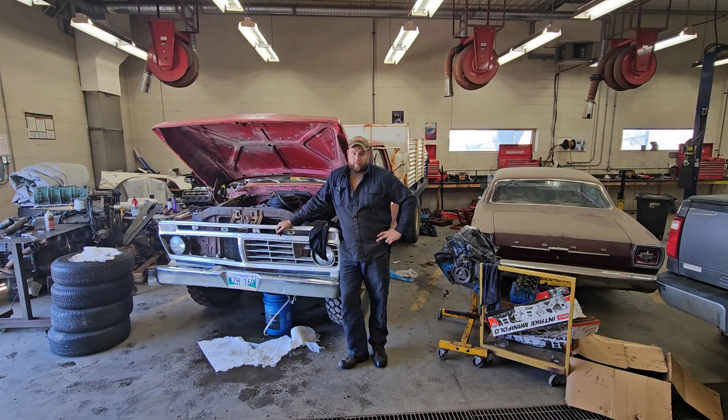If you're seeing this, it means I have survived and I was successful.

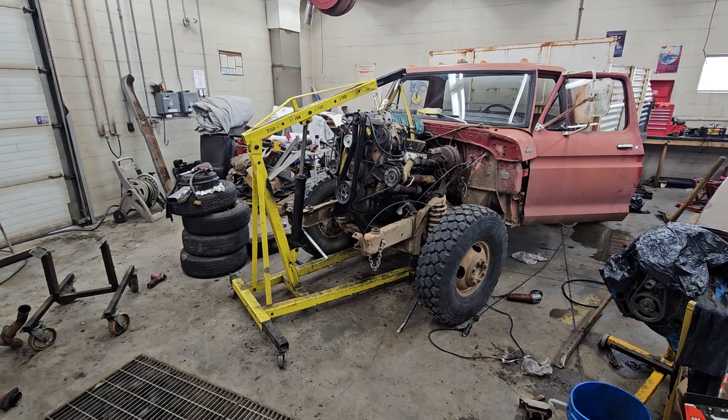So the only kind of thing I have to do here was to take out the Y, the exhaust Y. Give myself a bit more room here. And pieces of floor missing. Pretty sure the time lapse caught that one. Lucky for me, this engine doesn't weigh anything. Okay, I have to go set up the transmission here. Oh, life is painful. So all I'm doing right now basically is I'm jacking up the back of the transmission. I'm trying to, where's my convincing bar? Ooh. Quite a ballet, I must say.

There we go. Okay, so both the mounts are engaged. Wow. There we go. Okay, so that's done. Now we're going to get cracking on the transmission mount, which I don't think I can reuse the factory one. Of course, right? All right, guys. Kind of thought I'd show you what's going on back here. So basically the back end of the transmission here, my jack contraption, and then my cross member. So luckily for me, all I'm going to do is drill 2 holes because you can see there's nothing in there right now. And I have these bolts here, these studs, if you will.

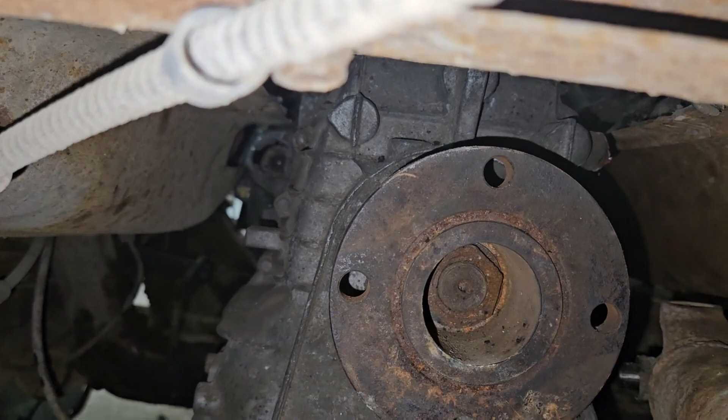Those studs back there have to go through, and that's what physically holds my transmission. So just gonna measure out basically where they are. And then afterwards, I'm gonna drill through the bottom here, put spacers to the appropriate height because the transmission sits just a tad too low right now. Although I have next to no clearance, it's still too low. And then, yeah, this engine will be mounted. Went ahead and put the front clip back on here. Honestly, it was the same as taking it off. It just fell right back into place. So it's just loosely held on right now.

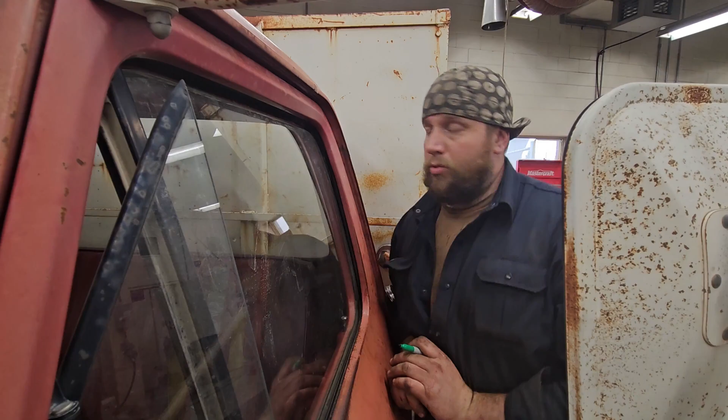We're at the point here where I'm kind of lost with what I have to do. So it is time to make a list. Okay, so for lack of a pizza box, we's gonna use the back here. So what do I got left to do here? I have the coolant hoses, the starter, the hood. I'm gonna put cut here so we kind of know what's going on. Oops, not cute. My God, that hood is gonna be cute though. All right, the drive shaft. That one's gonna be a big one. Shart. I'm having a hard time today, folks. What else? Ooh, the clutch.

Clutch pedal, I guess. Then I got to fab up a floor plate, because I'll show you in a bit here. Basically what I had to do to fit the transmission, I cut the absolute living everything out of the floor to get that thing to fit. So still got to do quite a bit of work there to get the drive shaft to fit. In a nutshell, got to remove the seat, got to cut a hump, and then got to do some other work back there, but not quite there yet.

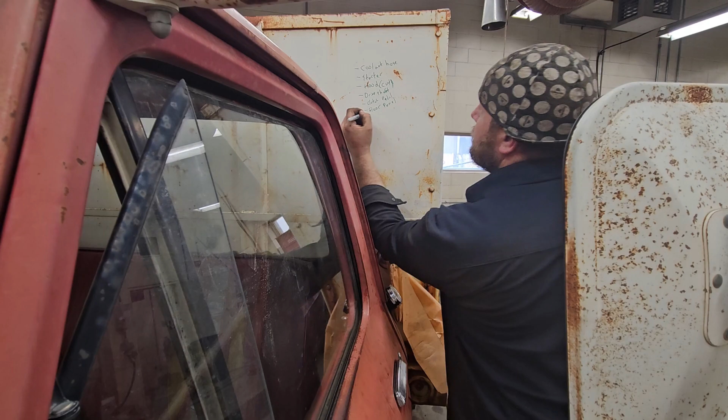If I can get everything to start and run on its own power, that'll be a good start. But yes, drive shaft. Sorry, not drive shaft, the floor. Floor panel, there we go. Okay, what else do I got? Shifter. We're gonna have to rig up an electric fan. I guess wiring. There's quite a bit of wiring to do.

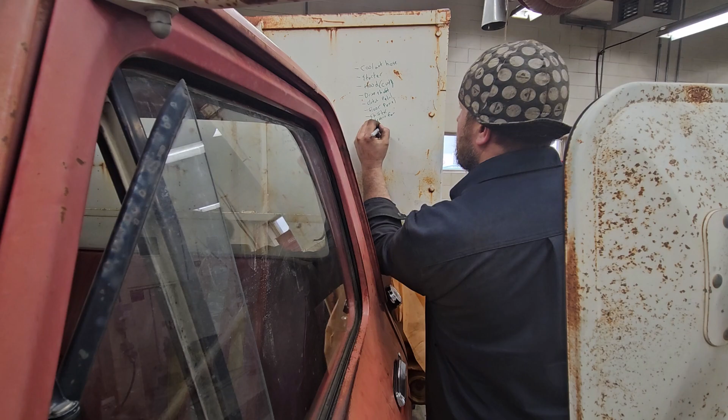All right. Mr. Freiberger and Mr. Steve Morris would be very disappointed that I did this on the back of the truck, but you know what? It's gonna add character to this. So, what am I gonna do first? Go with the coolant hoses, I guess.

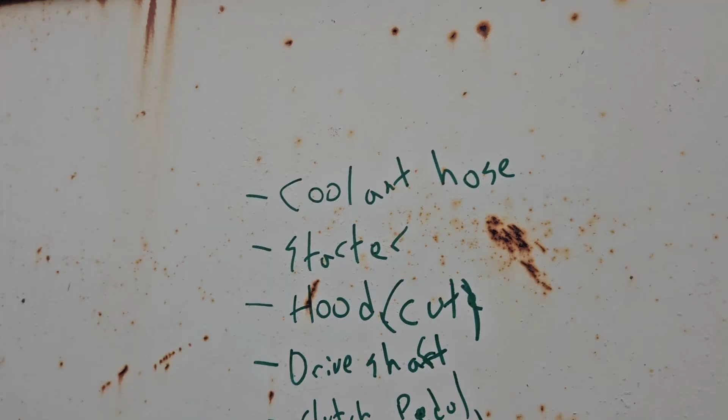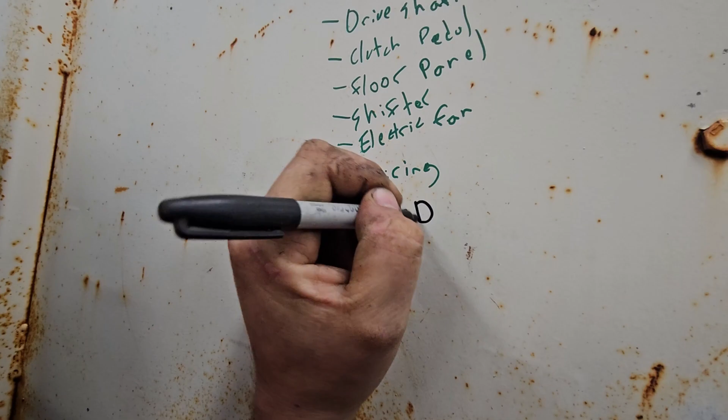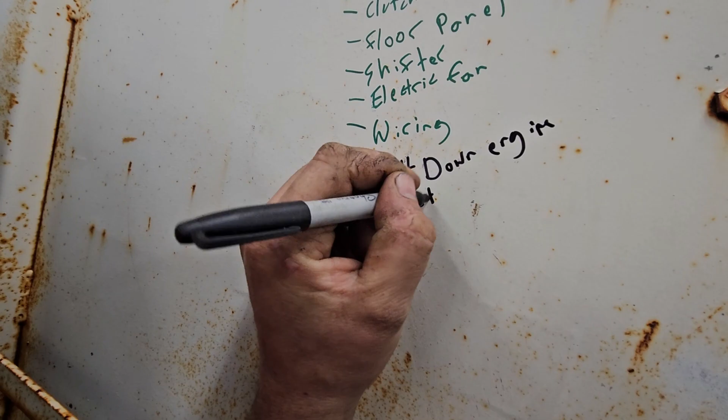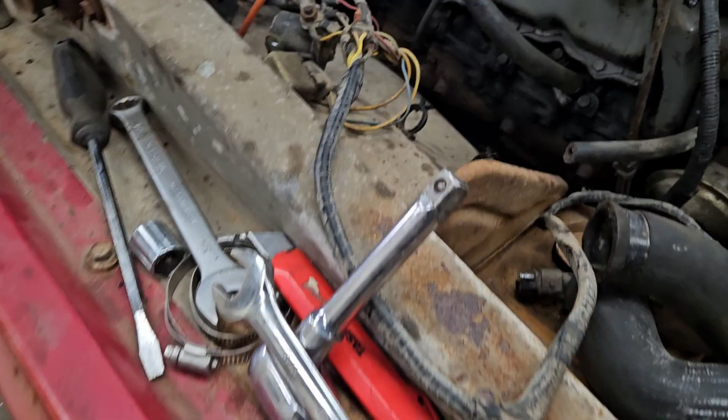Something about one step forward and two steps back. Whoops. Probably need that. Throttle? I think there's one T too many here. Okay. Let's bolt the engine right now, it'll be done. Whew, that was a pain for sure.

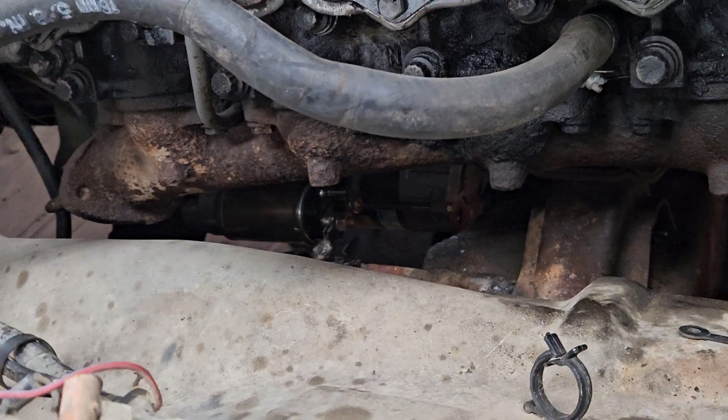You can see there's a little bit of a heated, how can I call it, heated self-clearing thing going on right there. Yeah. The only thing I got left to do is I gotta change the position of that terminal, because this is positive and it's a little bit too close to the frame. So basically I'm just gonna unscrew this, turn it back up, but I gotta change the color of the wire anyways, because right now the wire is black and I don't want that.

So with that being said, I think I'll go with the throttle linkage. The problem I have with this one is that the throttle, of course, is on this side and Fords have their linkage on the other side. So I'm gonna have to, I don't know what. I'll sort something out and I'll get back to you.

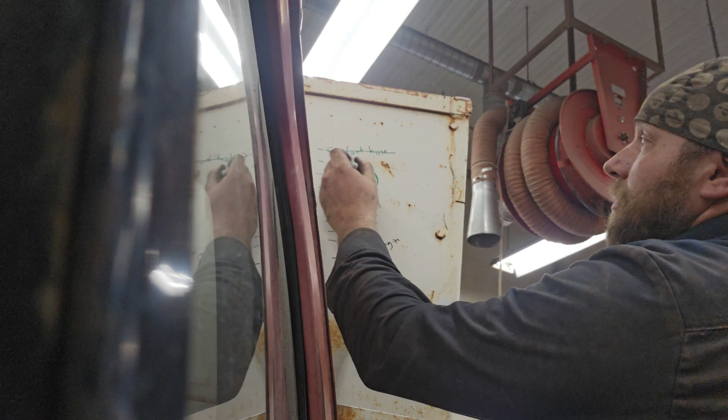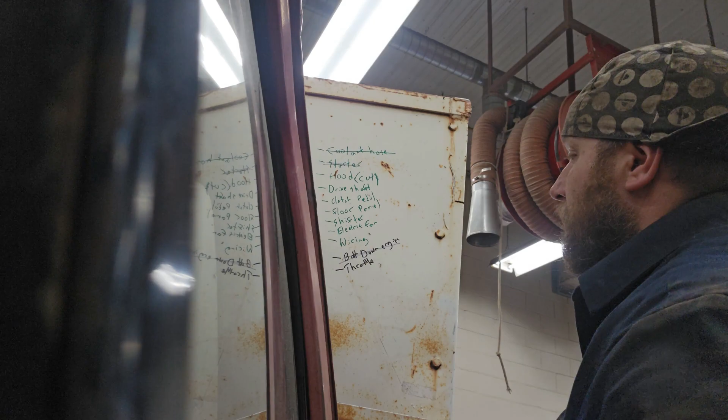Yeah, we're doing pretty good. Doing pretty good, actually. There's a couple of things I've been kind of, not skipping, but just putting to the back. And I think we're there, unfortunately. We're there. So I went ahead and mounted the heater, that one, as you just saw there. The battery I bolted down as well. Wow, this is a good marker. Luckily for me, I have 7 backups. All right, cool. That one's done. That one's done. So it leaves a few things.

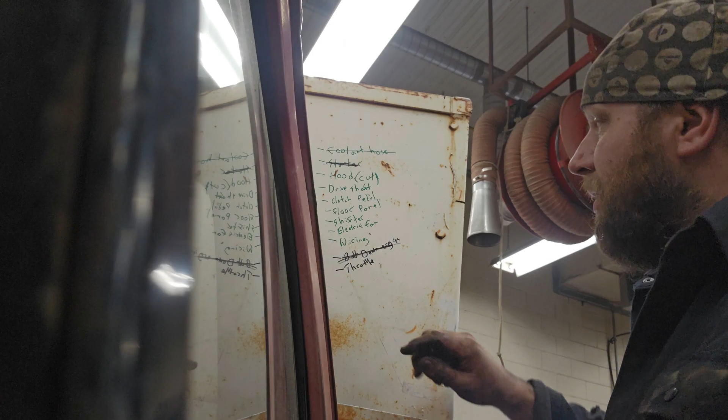Throttle, I went ahead and ordered, hey, stay there, you. There we go. Throttle, I went ahead and ordered a cable basically, because the problem I have is that the way these pumps are designed, the pump is on this side and my throttle's on this side. So I need a way to kind of loop-de-loop, and that's about 40 inches or so. Gives you a rough idea. So that cable's coming.

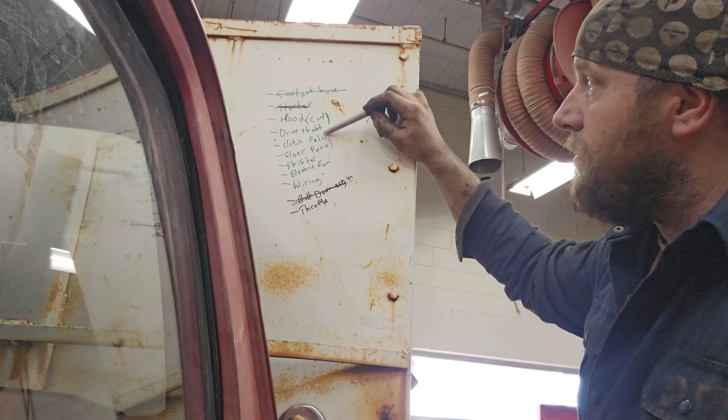The wiring I started doing a little bit with. I don't have the right crimps right now, so what am I saying? Who cares? Anyways, editing. Editing is key. So where was I at here? Throttle cable, ordered, good to go. Hood, I'm gonna do that completely at the end. Drive shaft, that is coming up, right? But I think right now what I'm gonna do is these two right here. So basically get our clutch and get our floor panel sorted out.

So in a nutshell, again, the floor is cut up. Oh my, the floor is cut up. So that hump where the transmission usually goes, oh, little dog in there. That hump where the transmission usually goes, that's out right now. And then due to where the clutch goes, I actually have to cut almost like into the floor. So I'm gonna have to potentially relocate the gas pedal.

So what I'm gonna do, we're going to set up in the cab, get some lighting in there for you guys. Most likely gonna remove the seat, right? And then, oh yeah, let's get into it. Start cutting. Things get cut.

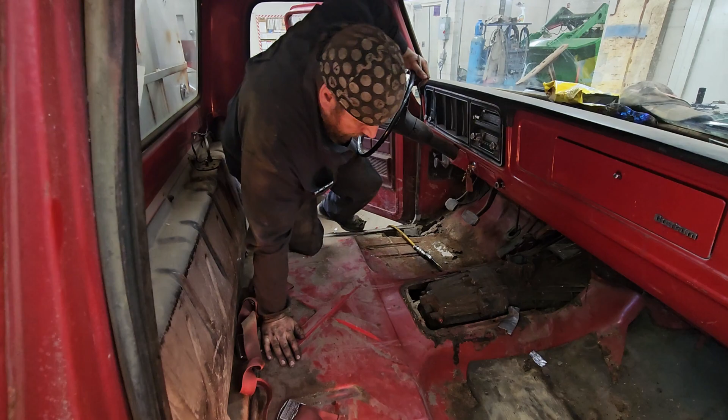Well, hello. So as you can tell here, this transmission is massive, absolutely massive.

The issue I had was I had to cut part of the floor here to pass the hump for the clutch cylinder. Then I had to cut a piece of the firewall to be able to pass the shifter assembly, which I should definitely cover because there's going to be some dust in here.

Now the other problem I have, everything fits back here, no problem, but the yoke is really, really close to the floor. I'm not a big fan of that because there's always a chance that something moves and hits the floor, so I'm trying to get at that.

So what I'm planning on doing, there's a rib that goes right here. You can see all the spot welds. I'm going to cut past the rib, following the line from the inside, something like that most likely, and stop right here just to make it easy on the fabrication afterwards.

So we're going to cut that out. Once that's out, I can start mocking up the drive shaft to see if everything lines up. So first step, get this piece of floor out of here.

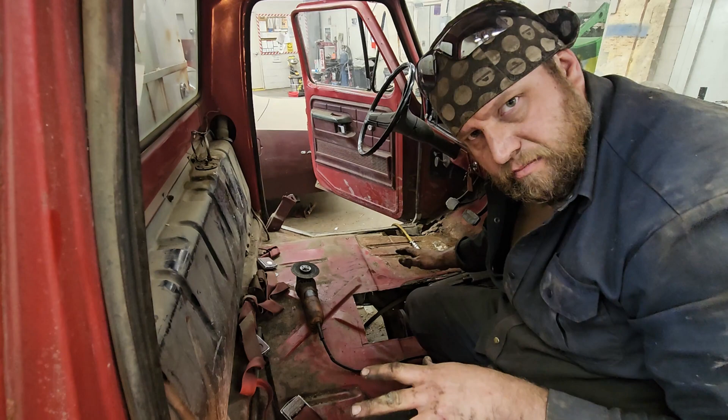Well folks, something I've been dreading for a while — I got to do another drive shaft. If you guys remember one of my previous episodes, I went through my procedure on how I do one of these drive shafts. It's going to be a little harder with this one because it's on the floor. I can't have it on the lift, but I'm going to do exactly the same thing.

So first step, obviously, is cut the end off so the end of the yoke comes off. I already have the dimensions I need, so I know that from center to center I'm going to need 39 inches.

So first thing I'm going to do is cut the end off. Then afterwards — oh, got a little leak over there — cut the end off, cut the part that I need off of it, jam everything back in, and then just tack it quickly.

Just using a measuring tape basically, tack it in place, and then put it in the truck, spin it, and align it. Good stuff, really good stuff. Let's get cracking.

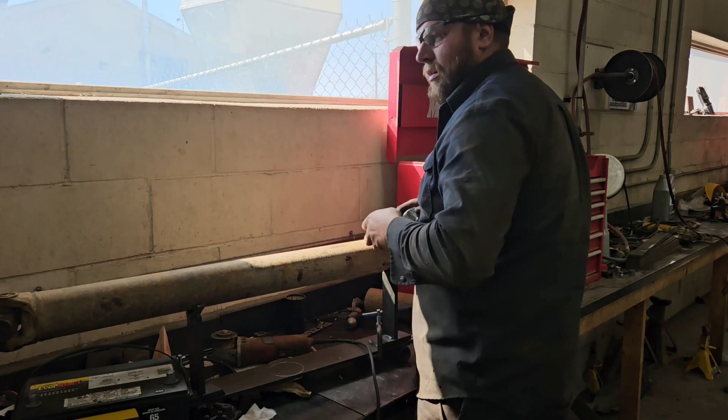So I ended up working on the throttle here, ran out of time, so I said, you know what, I'll just get the little things done. So the problem I have is with the throttle.

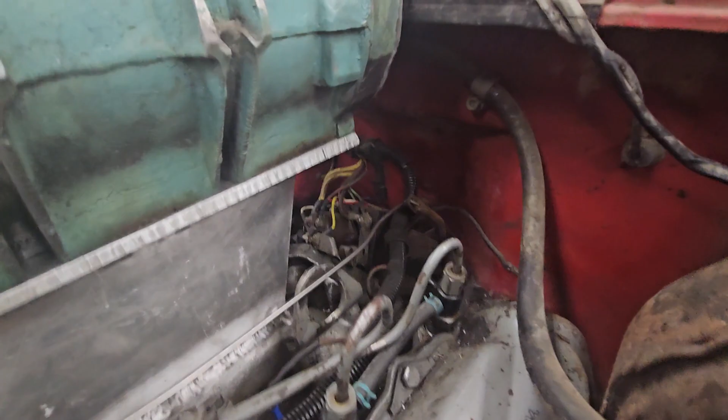The linkage is right there, and on the other side of the blower — right down there, you can barely make it out — is where the pump is.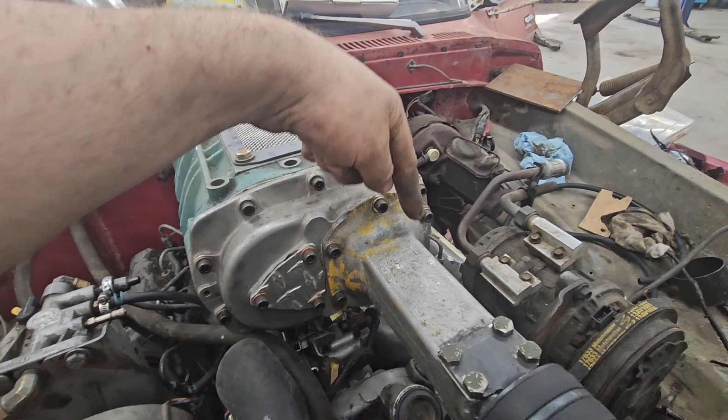So initially what I thought about doing was get a cable that went all the way across there and then back on the other side and looped back. It didn't work, it didn't work. So I had to make just a crossover linkage basically.

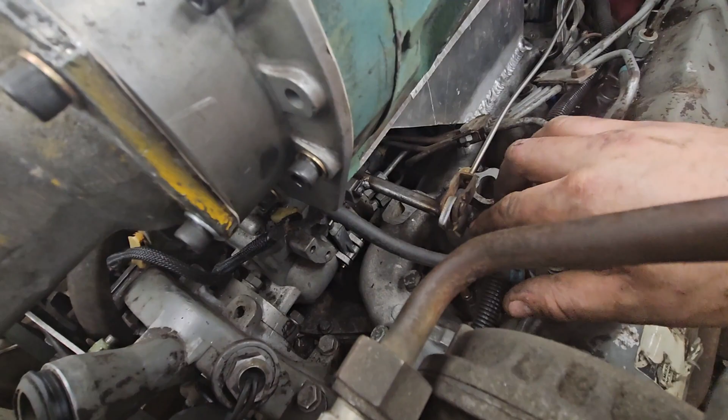So what I did, I took a piece of all-thread, trying to get a good angle — a little better for you guys there — took the piece of all-thread and passed it through this tube. The tube is secured through this little bolt here, and the other one right there.

That goes all the way across. It's just tacked for now, I didn't finish it. But in a nutshell, there's a cam right here, and when you activate the throttle...

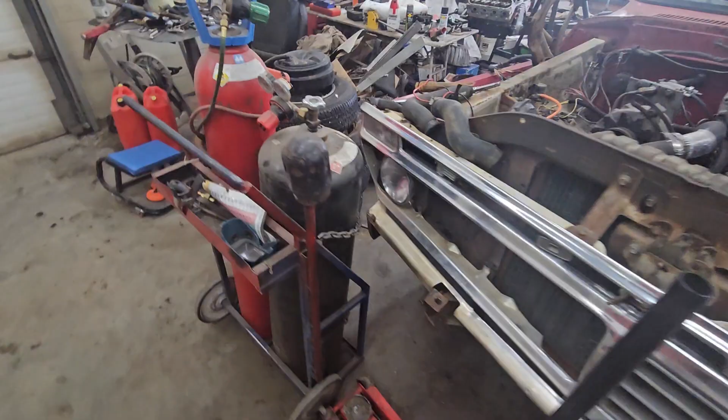...it pulls on the cam, and then that rod goes all the way through to — oh my God, this is a tight spot — there we go, you can just see the end of it here.

The end of it here. Give me a sec, I'll try to give you a little zoom. So the end of the rod is right there, right there. Then there's another cam up there, the original adjustment, and then you can see where the ball and the spring is there.

Right down here, my pinky is, and that's on the pump. So, that being said, that's the throttle.

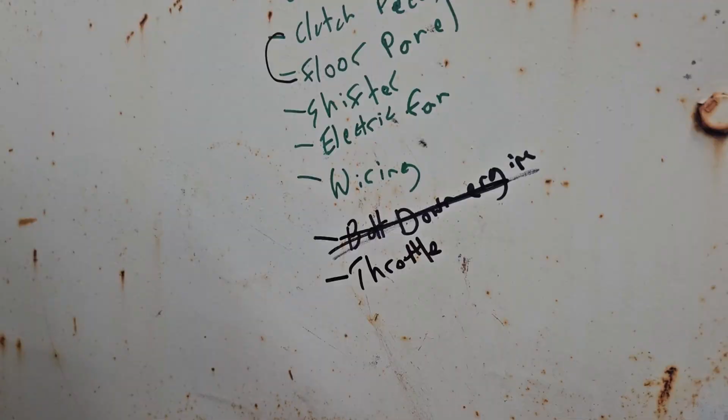I'm sorry you had to witness that.

Okay, what I want to do here is attack a little bit of the wiring. So the wiring on this is extremely simple. I basically got one plug here — well, the plug got removed, but there used to be all into a plug here — and that's all I got for the engine.

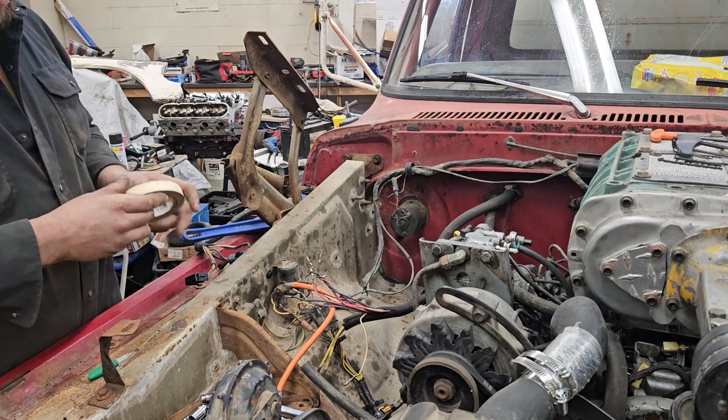So what I'm going to do is the same thing I always do, and what I recommend you guys do when you start attacking wiring, is find what the wires do and label them. Once they're labeled, you don't have to find a second time what they do — a little piece of masking tape comes off super easy.

So for example, I know that these two right there go to my glow plug relay. So they're the supply source for the glow plug relay.

So power — I'll just put 'plugs' on there so I know, power for the plugs. Now what do all the rest of these wires do? You have to think about the accessories, right? For example, we have the fuel bowl heater that's here.

You can check and see the fuel bowl heater and the fuel pressure sensor are all in that same line. The fuel pressure sensor, I can tell from this line - you probably can't see it from that angle - but it's gray and red. So then I can start looking through here. Bam, gray and red, that's another wire I can identify. Same thing, little piece of tape, doesn't need to be much. Pressure sensor.

So in a nutshell, I'm going to go through and identify as much as I can, and a lot of the times you can't identify what they do because it's for an accessory of some sort. So you'll go into the plugs - I believe I tossed the plug this was on - but you'll go into the plug, and the receiving side of it's just going to have no receptacle whatsoever. So then you know at that point that wire is pretty much useless. So we're going to connect as many as we can.

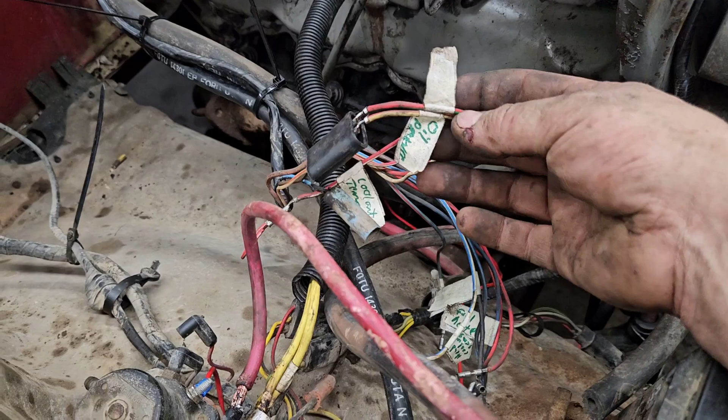Well, the wiring looks a bit like a nightmare, but you can still see what I was talking about. I labeled everything - these are the original wires from the truck. I don't have a plug to replace this one right now, so for the time being they're crimped in there. The rest of these definitely have to do something. For example, there's the fuel heater right there - I'm going to leave it always on. Then the wait-to-start light, little things. Some of these other wires here are all for accessories or other things I'm not going to be using, but for now I've tried it. Oops, I need to replug this. There you go - I tried it, so now on the key the relays turn on, the pump turns on, and on the start function the engine turns. So for the time being...

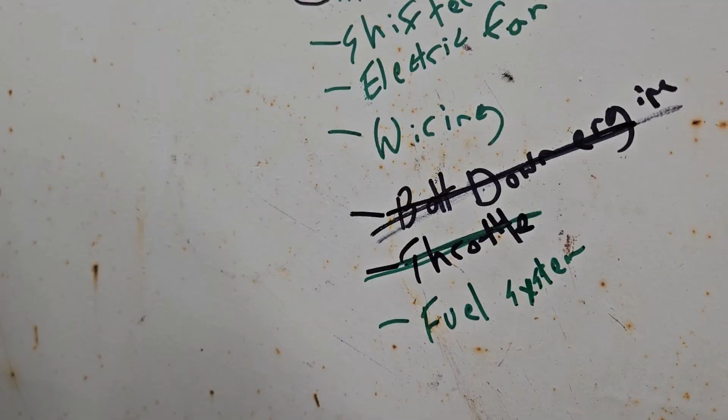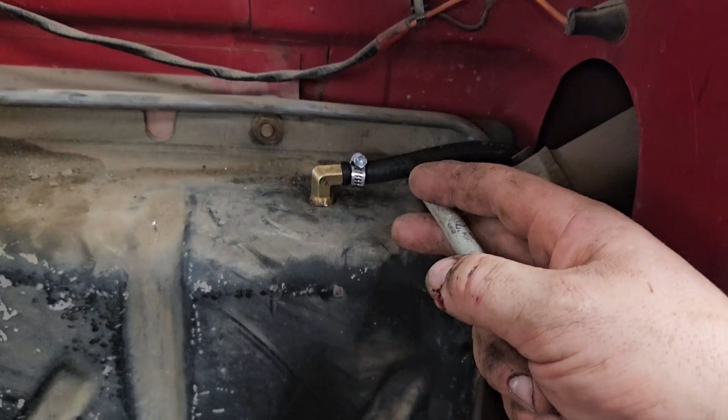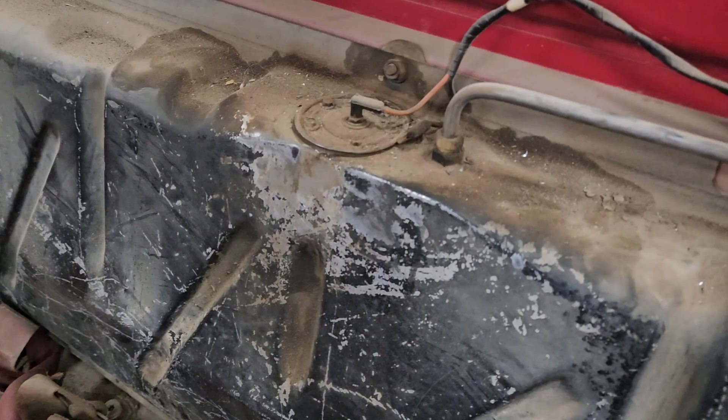All right, just spent a little bit of time on our fuel system. We got our return line plumbed in - all I did was tap into the tank. There's a drop tube in there, and then there's some special sealant up in here. The original pickup is just the right size, so we're going to leave that as is. And then...

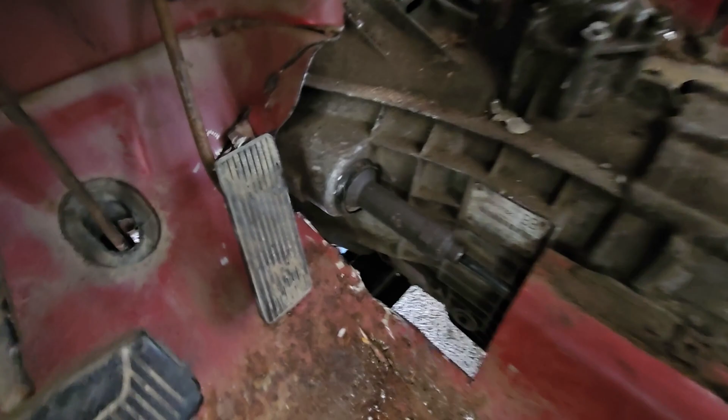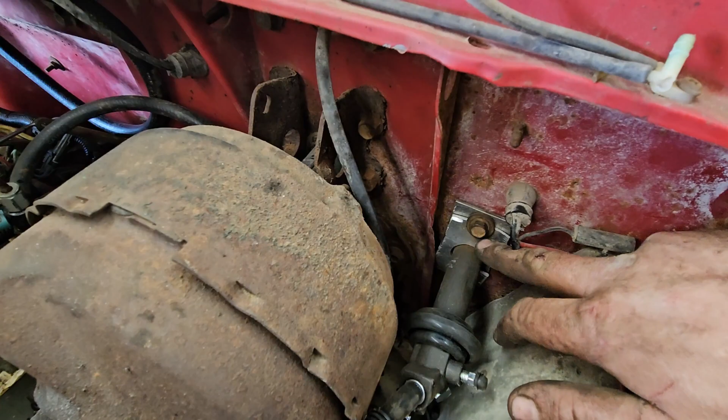I do apologize, I've been doing some work off camera, but I'm focusing more on the end result here. As you can see, that clutch engagement cylinder has been installed. Then I went ahead and retrofitted the other part of that cylinder up top here. Basically all it is, is these two plates sandwich the center here - there was no physical bolt holes to hold that in place, so it's just two plates. They pinch the center, with a nut on the back side.

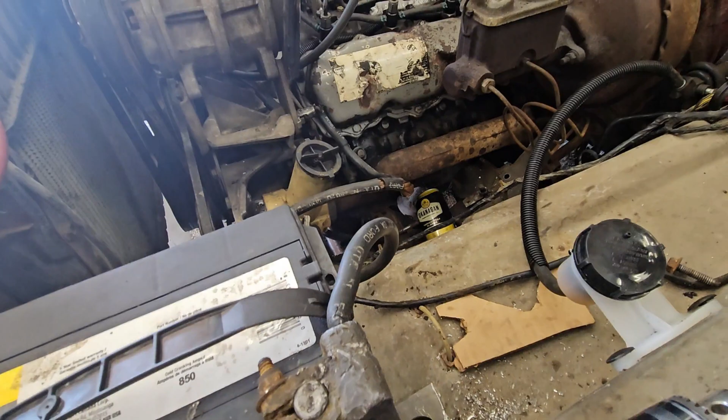Remote reservoir, nice and close to the front, but still higher than our cylinder, so all the air is still going to come through here. This one's a little weird - it has a bleed screw right here. Don't really understand the system, but I'm not going to argue. It's going to function.

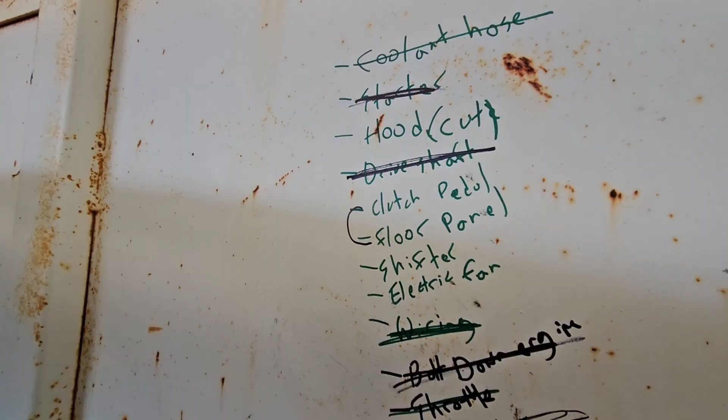What to do next? This one I don't have here. This I'm going to wait for this part - I don't want to start that, which leaves me... yeah, all right, let's get into that.

I'm looking forward to this one. So cutting the hood was like the reward? I don't know, whatever - the reward I was looking for, or saving until the end. So iconic as it may be, I don't know. Having something sticking out of the hood is pretty badass. I'm visibly excited, I'm pretty sure - this is my level of excitement.

Before I do that though, on the other side of this, I traced out already the parts I want to cut.

It's just a lot of measuring. Fords are pretty lucky because they have that little peak in the center, and they have that on the body as well. So I just measured from the peak and saw basically what I had to do, did my measurements from that.

An important consideration is that you're taking away all of the support that holds this hood together, mainly this rib right here. I don't know if you guys can see it, but I'll get a better angle. So I've got to cut through all this and through the center here. So before I do that...

I don't have a whole lot of room in the back here, unfortunately, due to the nature of where the blower is positioned. But I'm gonna put a piece of angle iron into the back here and try to tie it as much as I can outside of where I'm gonna be making my cuts, just to give it a little rigidity because it's gonna try to flex on me.

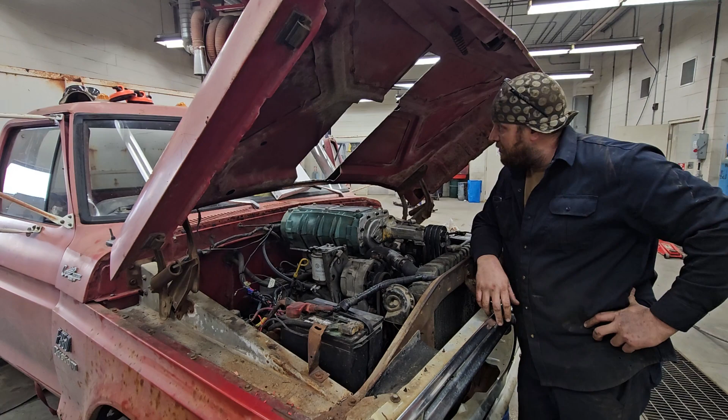Well, at first observation, I could tell you I'm gonna have to angle these a little bit. I'm still worried about the back. I haven't tried it yet. Enough talking, let's just do it.

Oh my, it might just fit perfectly. Well. Not bad, not bad.

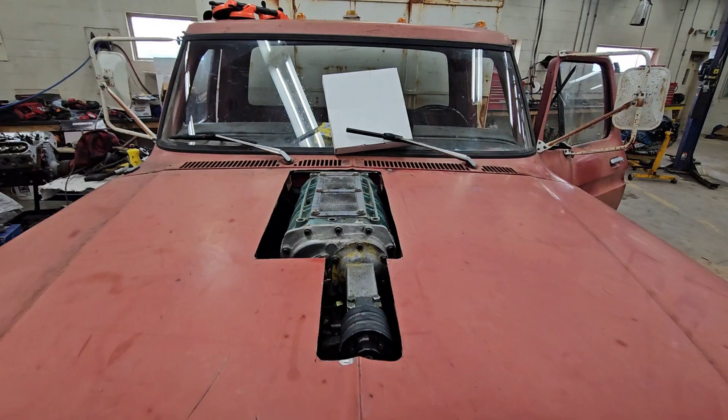If anything, you can tell I cut it a little bit too wide on this side, you know what I mean? But all in all, I think it won't be too bad. I think it won't be too bad at all.

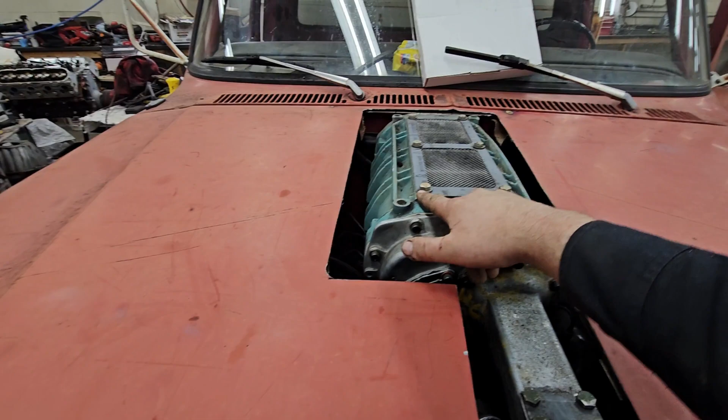Oh, this thing is amazing. All right, I think what I'm gonna do right now is start working on the Mohawk kind of hood scoop thing that I got. So what I want is to use as much of this as I have, and then I have bolting points up here. Now, the hood's gonna have to get cut again, but that's because of the air intake.

So what I'm planning on doing is taking the air from underneath. I don't want ram air because it's gotta be functional, right? So rain, snow, it doesn't agree too well with that. So...

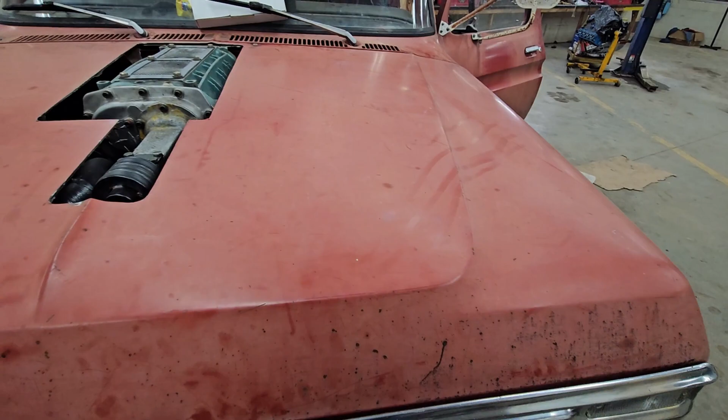Or I put a filter in the back. Now, regardless, it's gonna be like this, and then it's gonna be pipes coming into either the side or completely in the back, and the air will come from underneath, more or less in this area via a pile of pipes and all that stuff. Okay, hopefully you guys can see what I'm doing here.

I'm gonna be playing with something called silicon bronze. So I went ahead, cut some of the parts that I needed to do my scoop, right? I took the rest of the piece of metal that was there, did some cuts on the side so I can bend it. And then I got a profile that I kind of like, or at least something I can play with right now. So I cut this.

This is, I believe, 21 gauge. I'm not quite sure, anyways. Current automotive grade, whatever it is. So silicon bronze is really good when it comes time to working with really, really fine, thin materials.

And I have another project coming up here where I'm going to be working on an older car, my baby. Anyways, so I want to start practicing a little bit. So I'm going to take the opportunity here. I went ahead and cleaned one side along the edge of where I'm going to be soldering this.

And yeah, let's see what's up, I guess. I guess I need a ground, don't I? Probably a good idea.

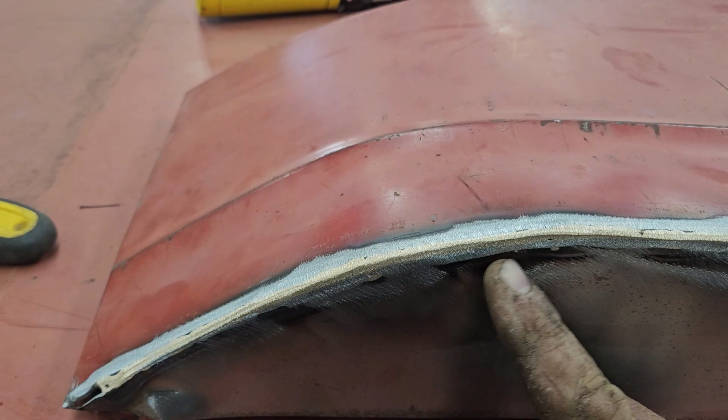Oops, I left a little tiny bit there. Whatever, a couple little pinholes, but I mean, this is not bad. What I like about it is that the base metal didn't melt once, nor did this metal melt.

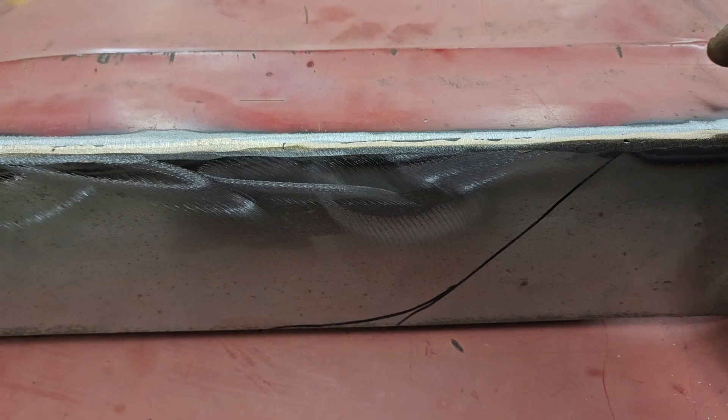So when I came in, I just got my pool going, started pulling or pushing. Actually, I tried both of them. And some places got a little better than others. Some other places didn't quite get the coverage, right?

But it is still soldered though. You can tell on the other side because it has about 1/8 of an inch of flow in between the two parts there. But the finish is really, really nice. I like it. I might use this stuff a bit more in the future.

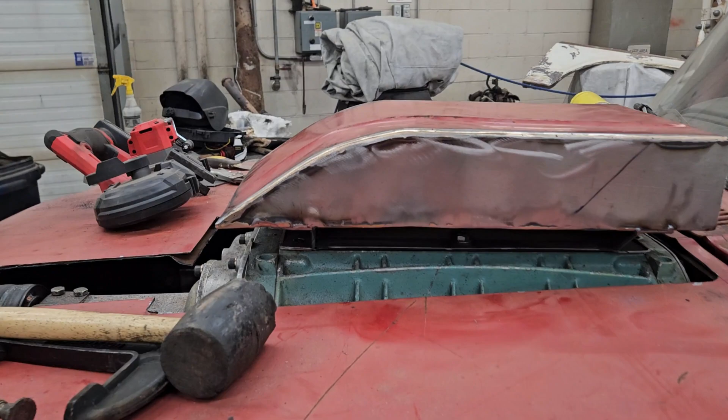For now, I'm calling this a done. Let's see what it looks like from the front with all the tools. Holy!

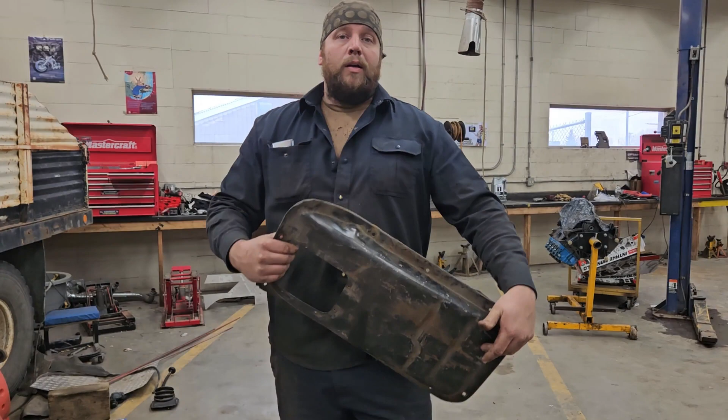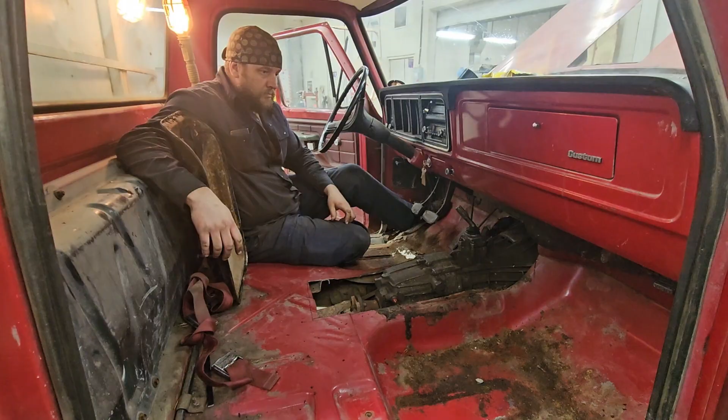Oh, the part I've been dreading here. So there's a huge hole in the floor. There's holes caused by time, which we're not going to address, and holes caused by some Sasquatch that we are going to address. This used to cover the hole in the floor for the transmission. I'll show you what I got to do here. The issue I have is this giant hole, obviously.

So the pan used to be something like this, but now that ain't gonna work. I'm thinking of reusing part of this because it's got the folds in it, so it's nice and strong, then raising it a little bit, and then finishing off the parts I need afterwards. What I'm gonna do quickly is measure how much steel I have right after I cut the perimeter out, because the perimeter isn't going to work anymore. Then we'll start cutting some steel.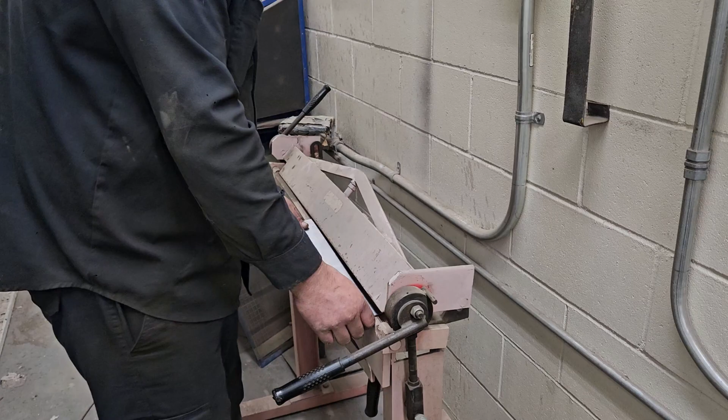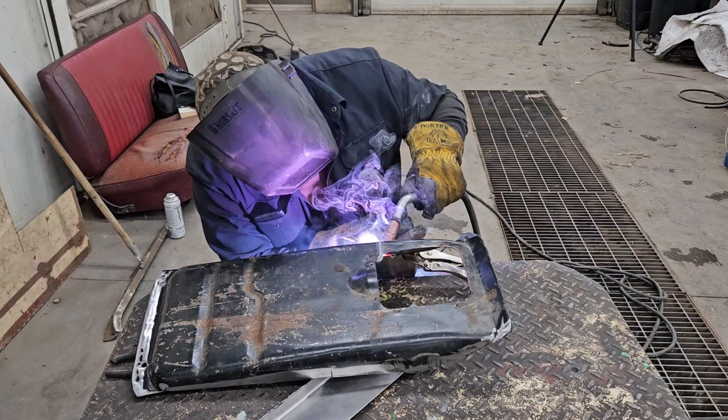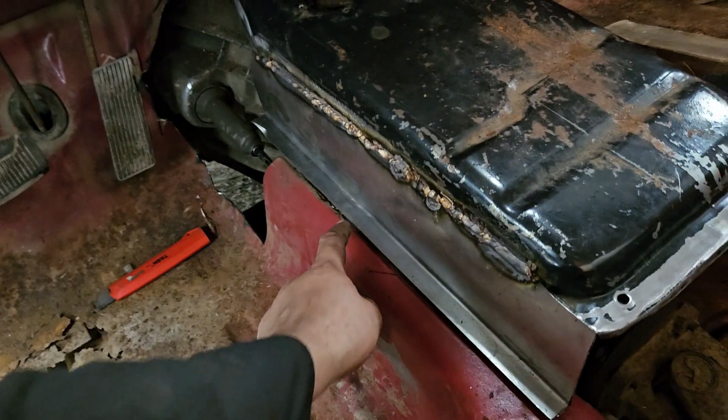So this is the first test try. It's not bad. What I'm planning on doing is put a couple self-tapping screws on both sides just to hold it in place. Then I'll start measuring, doing the back first, because I have a feeling I'm going to have to cut this at a slight angle. So we'll screw them in, then put the seat back in so I can see what's going on, and then take the seat out again.

After a little beating around, this is basically what I got. Initially I had to cut the floor to make room for the drive shaft, so I'm going to continue this pan up to about here and terminate it, then plug up this hole for the time being. All I have to do is make a little piece that comes from here, swoops down there, a little flat, because I need the flat to go across. Then I'm going to take the part, put a couple screws in, take it out, and finish welding the thing. So no time like now.

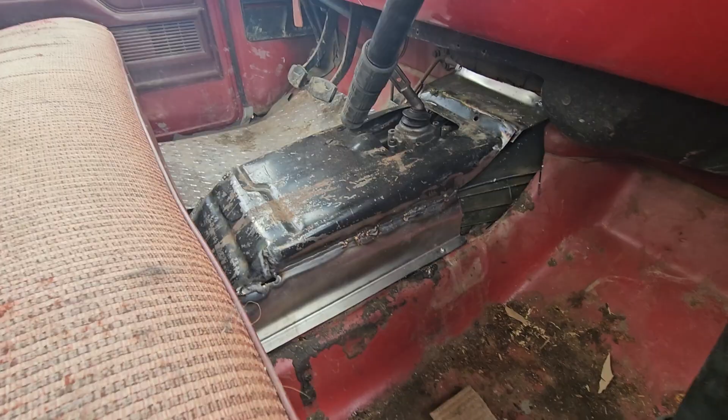I ran out of time and I want to get this video out, so I got enough to protect myself. The shifter's another story, I'm gonna have to sort that out. But in the grand scheme of things, ooh, it's outside. So you know what we're gonna do? We're gonna take it for a little spinny poo.